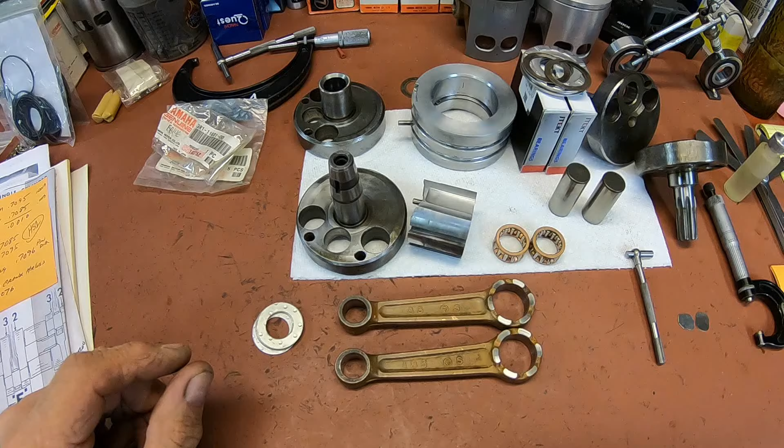Okay guys, I've got everything cleaned up here, measured up, and I think I'm ready to start the build on this. I'm sure I'll get sidetracked somewhere along the way, but we're going to get started anyway. As you can see, I've got all the halves cleaned up. I put them on a wire brush just to clean everything up, that way I wouldn't have any grit or anything to deal with, and then washed them with soap and water. Same with all the components I'm reusing.

Now, I decided to go ahead and use the Yamaha rods that were out of my spare crank. There's just absolutely nothing wrong with them. I was able to find the shims, which were OEM Yamaha, the bearings, OEM Yamaha, and the pins, also OEM Yamaha. So we should not have any problems here. This is everything you would have used anyway. I've had a lot of the 125 and 175 Enduros that don't need rods - everything's in good shape. You put a new bearing in it and pin, and you're on your way for another 50 years.

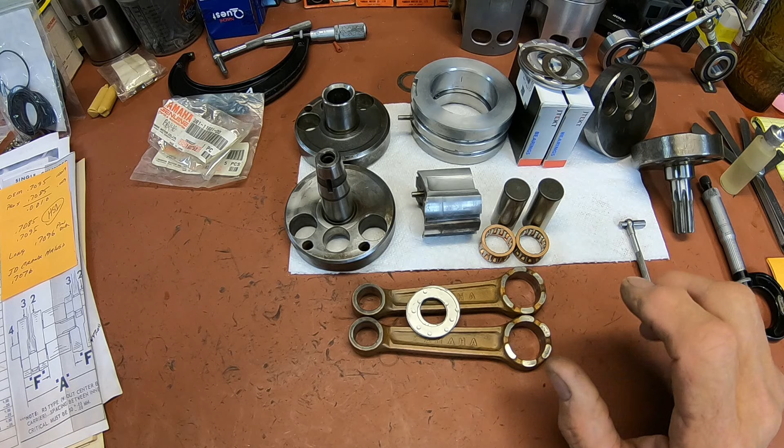So I don't have any trouble thinking about what I'm doing, it really seems reasonable to me. I do have a set of aftermarket rods, but I think I'm just going to save them. I've got a lot of engines running around here that can use those, because the RD125, I believe the AS1C, YASC, they all use it too. There's many that do. I think maybe the YL100 is the same, I'm not sure, but there are some components of the 100 that are different.

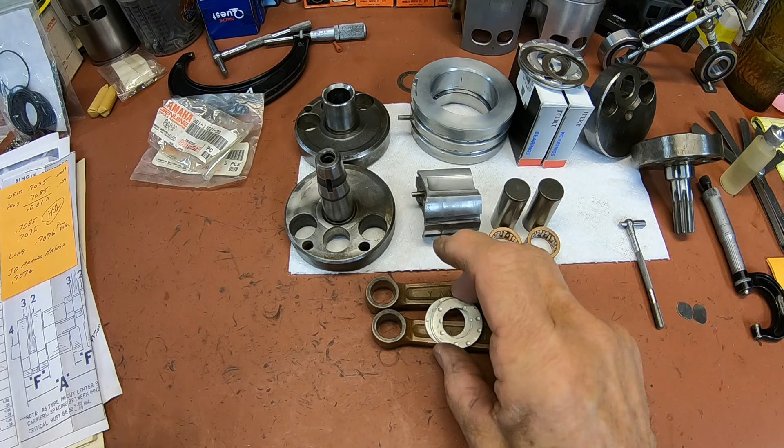The labyrinth seal is one thing that is different, so there are some differences in there. But anyhow, this is what I'm going to do, and I've measured everything up. I've counted the number of rollers here, they're the same as the ones that come out. The only difference I can see, these are within a thousandth of the same thickness. The only thing different is the length of the pin. These actually are a 3R1-1168-100, and they are about 50 thousandths shorter. Here's the original, and here's the new one. You can't hardly tell it, you just tell it when you measure it.

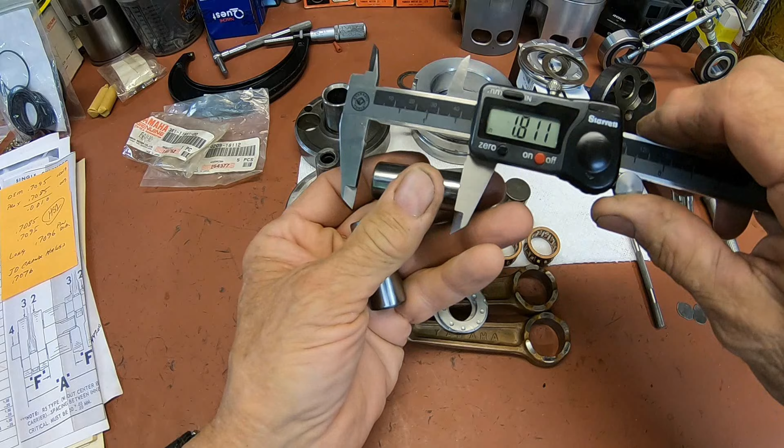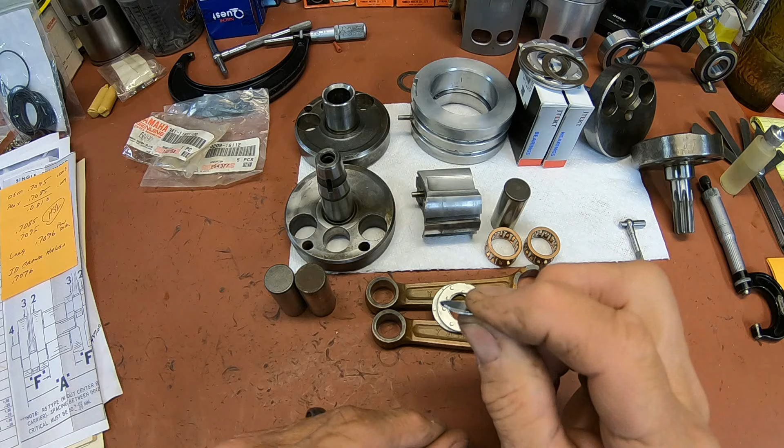So I'll be laying that in the hole as I install the pin on the first one, and that will be so it won't go quite all the way through. That way we're not going to be super short on the other side, that's the only reason for doing that. But this is the pin they list, so it should be comparable.

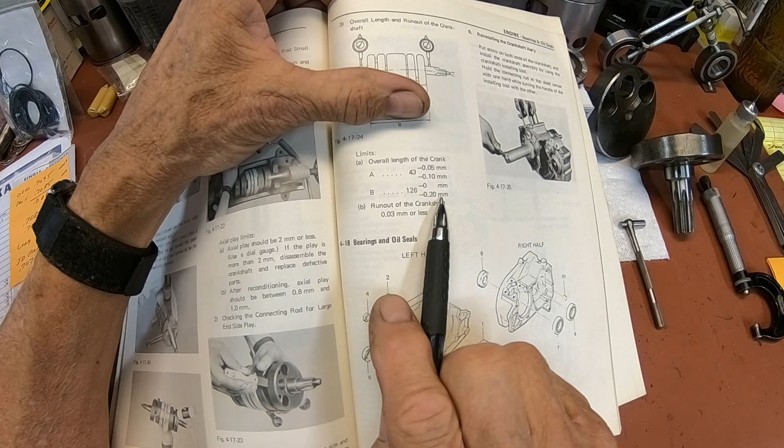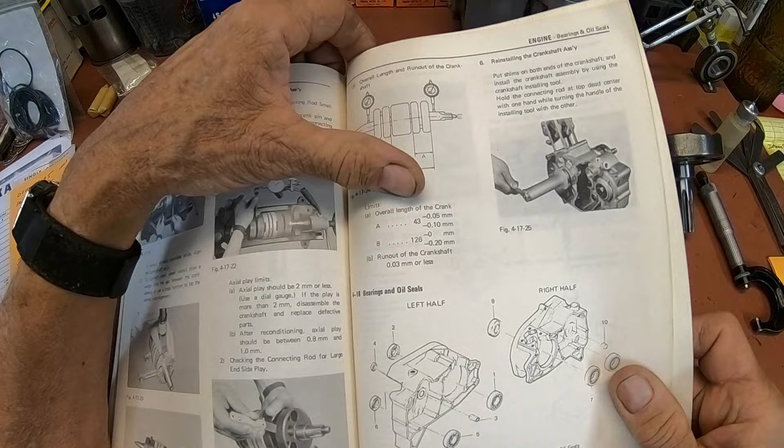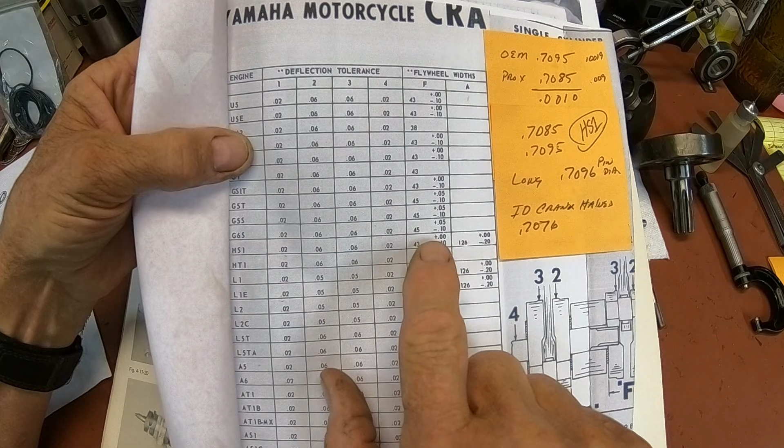Now, I was looking through my book here, and I noticed, when we put these together, we want 43 millimeters minus 0.10 millimeters for our overall width on a single. Then when we put it together, we want 126 millimeters minus 0.20 millimeters. Now what you'll see here is this 0.05 millimeter up at the top, and I'm not sure what they mean by that, so I went to my crankshaft chart, and when you look on here it's still saying plus 0 and minus 10, and minus 20 plus 0 on the whole, the two put together. So I'm going with that. I think they're trying to say plus 0.05 millimeter.

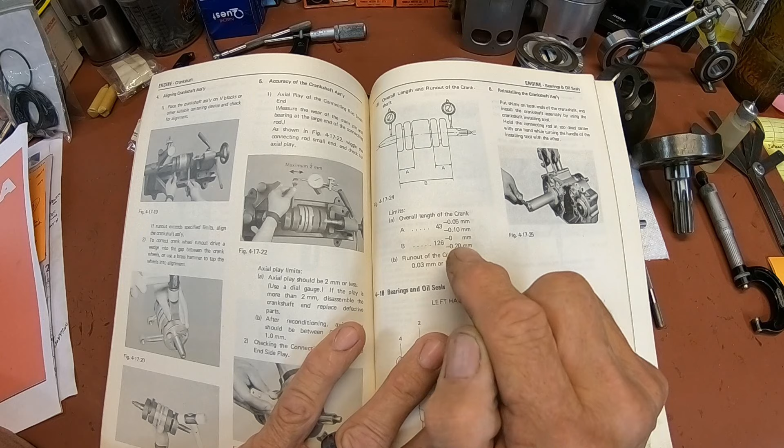But why would it change? I don't see the reason for the change. So I'm just going with the information that I've used in the past. I've always never added a plus to it. I've always gone on the minus side if I had to. That way you know it's going to fit back in a case and not be bound up or something else. So I've got the measurements that I had coming out, and actually we had one that was just a little bit over, but we're going to try to get as close to this as we can, only with no pluses.

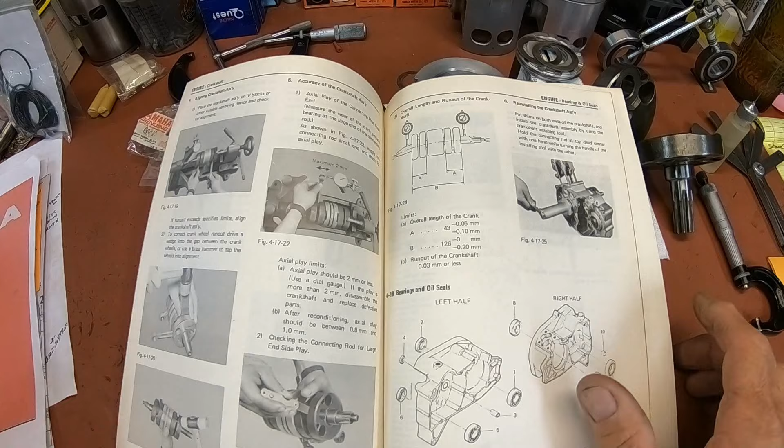So the first thing we'll be doing is we'll take this one here down and we'll go ahead and install a pin in using our shims to keep it from coming all the way through. And then we'll assemble our crank and go ahead and put the other half on.

Now the half, the mag side, this is the mag side, and this is the labyrinth seal side. This is, of course, your seal right here. This is where it fits, and I don't know what the difference is, but it does fit through there. And the whole reason is these slots in the middle are to slow down that movement. But this is normal for one with a labyrinth seal, with this type.

Okay, so that will eventually go in right here, and it goes in with an O-ring, and it'll probably have to be pressed in a little bit. It'll be an easy press, but it'll be a press.

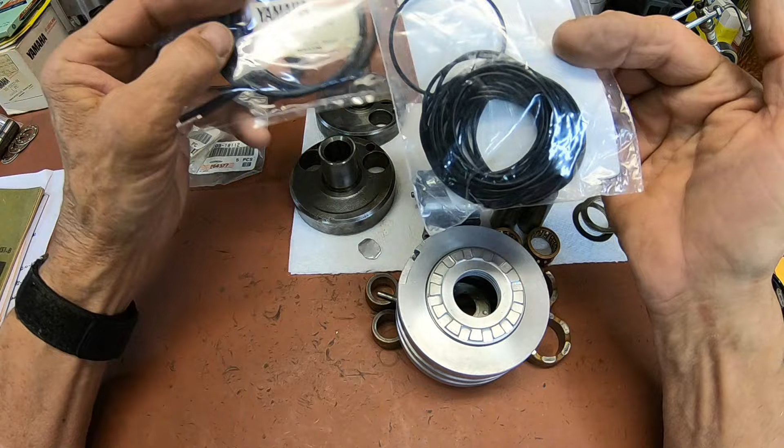I bought a whole bunch, now it's a package of 25, I think, new seals from Grainger. I just measured up the one that came out, and this is the one. I'm just not going to buy a 20 or 50-year-old O-ring and put in there. Have no choice on these. These are probably 50 years old, but they're going to be better than the ones that have a set in them that came out of it.

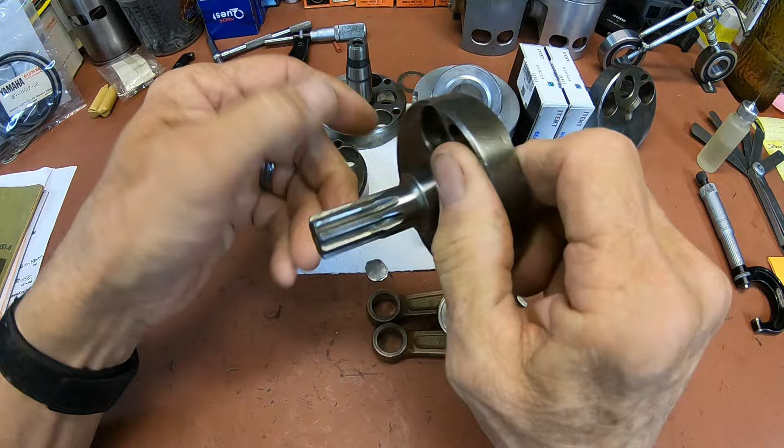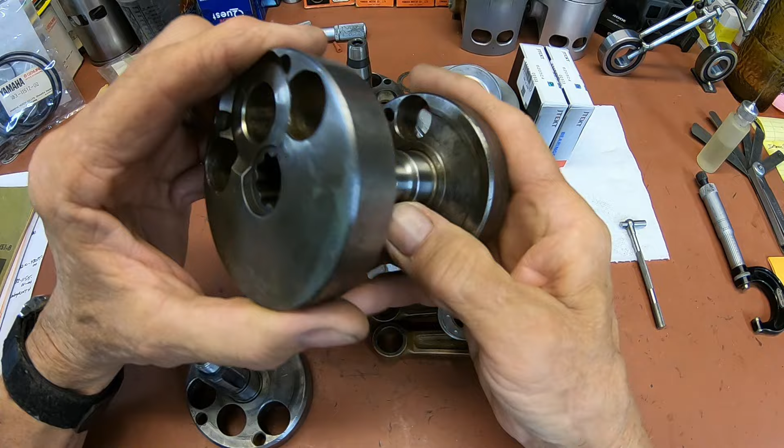So that I was able to get. These will press in when we get to that point. And we have to remember that we've got a shim on both sides of this. When this goes together, it'll get a shim right there, and same on the other side. And on the magneto side, or the clutch side rather, this is the clutch side here. Actually, this is the side that goes through the labyrinth seal, like this. And it's pretty much going to be pressed all the way down, I believe is how it works. They say you can't overdo it or underdo it. Well, I suppose you could underdo it, but you'd have the measurement to tell you that it's wrong. But anyway, the two splined pieces are pressed together, just like this.

So let me get set up. We'll go down and we'll start our first one.

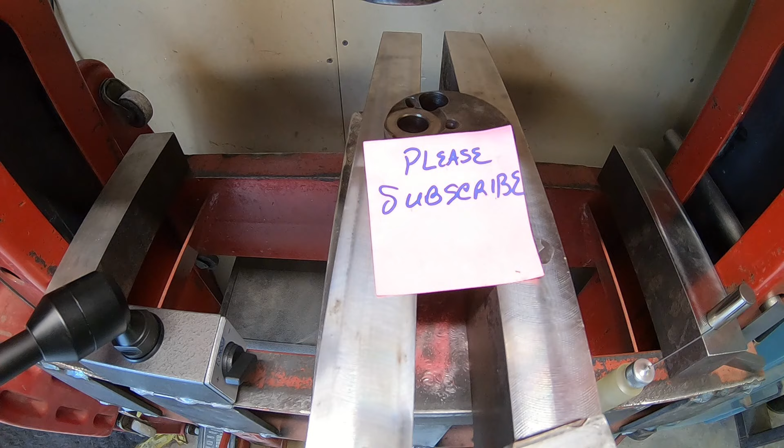Okay, I've got the part that I'm going to push the pin into here. I've already got it lubed up, and I'm going to put a little light oil on the pin also. And before I stick that in, I'm going to stick my little pile of shims in. Just want to make sure they lay down flat there. And everything should be good there.

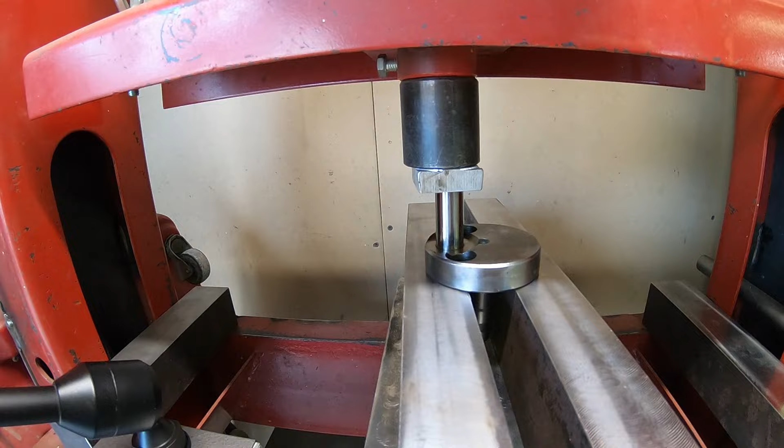Got our pin here, let me move that on down a little bit. And I'll put my aluminum pusher there. I think I went a little far. Try to keep it straight. All right, let's see if it'll push in there. Okay, that should be it. Pretty tight. Yeah, and that's what I was looking for there, just so it's not coming out the other side. I can always push it more if I need to, but that should be okay.

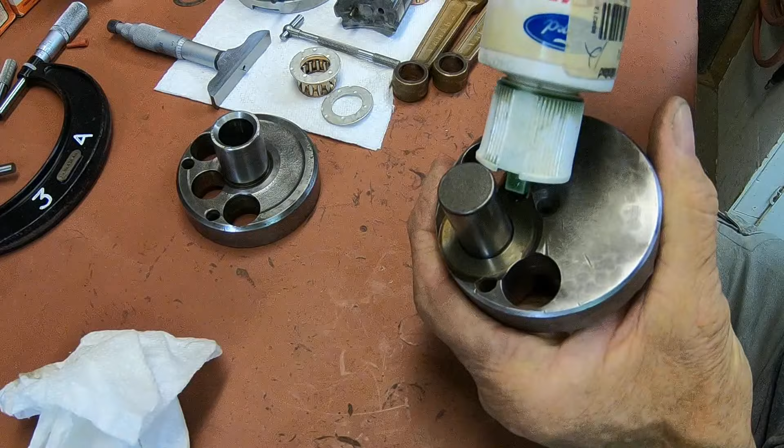Okay, so we need our assembly lube. Now we're looking for 4 to 12 thousandths in our gap here between the one side of the shim and the flywheel half.

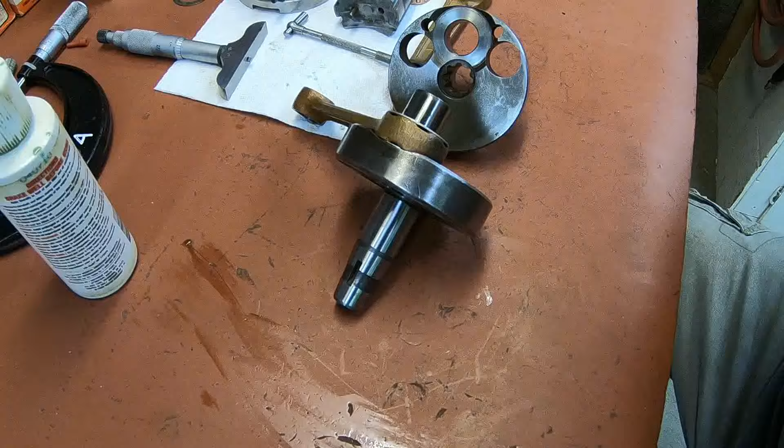Okay, so we've got everything here. We'll take our other half over and we'll try to straighten it out and press it on.

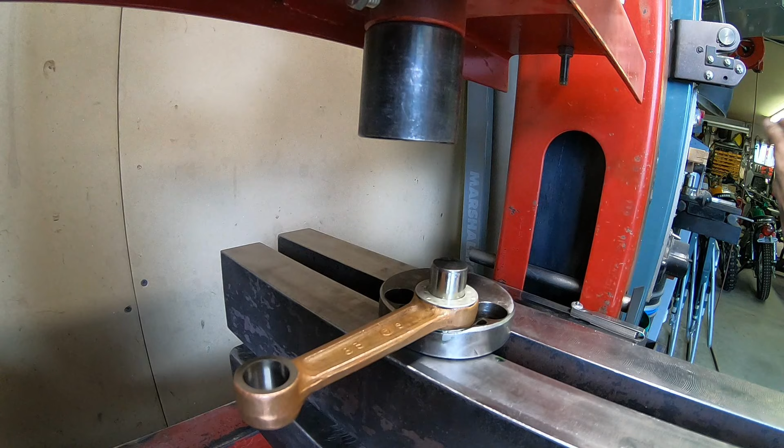Now I've got to stick my little shim back under there. So we'll stick it back in there, or shim pack rather, and I've got it in there with some grease. Real thin grease. That way I don't lose it when I try to stick it in there. And we got our oil on there, and in the flywheel half too.

Okay, I think I've got this pretty well lined up here. I just tapped it around until I am pretty square on 3 places, so that I believe will work. So we're kind of started, so let's start pushing here and see what happens.

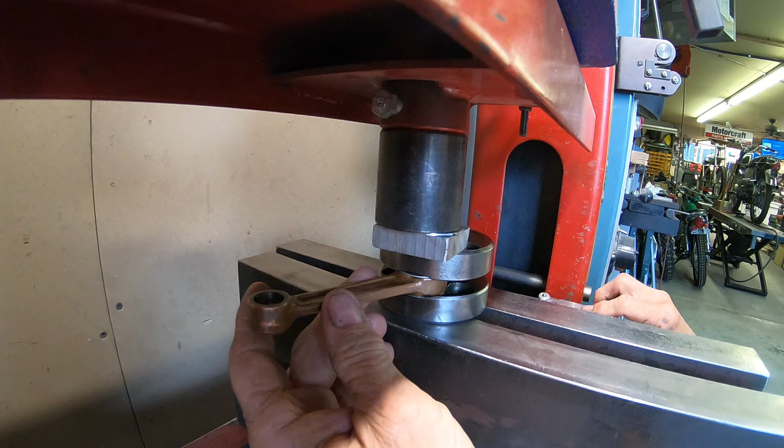And we're after... okay, I'm going to take it off and see where we're at there. I just don't want to go too far.

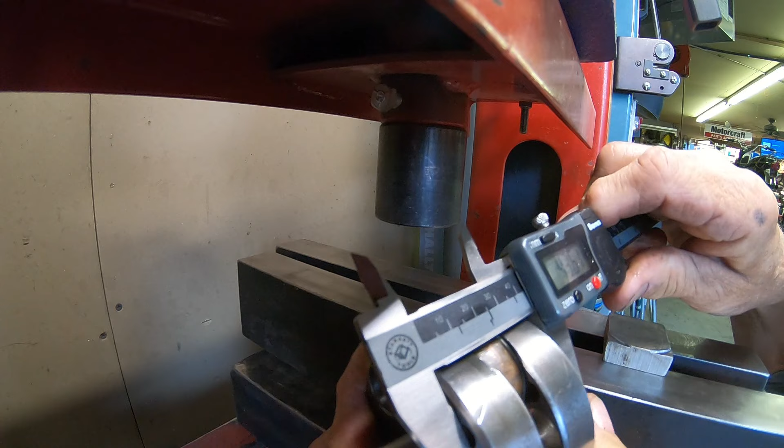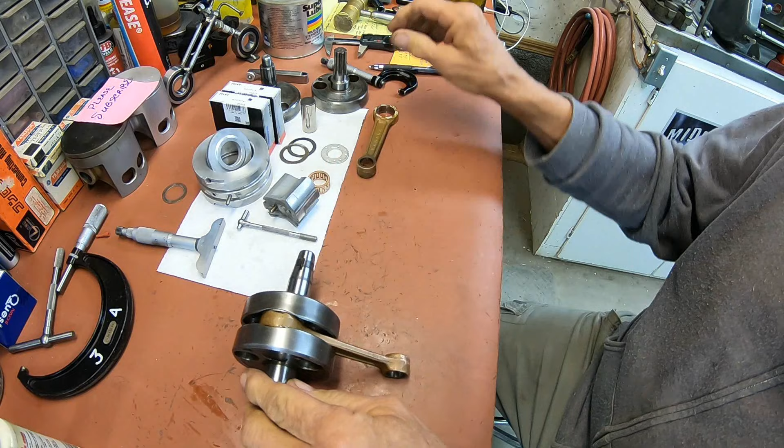Okay guys, I think we're looking pretty good. We're at 43 right there over the pin, and about 42.93, 180 out. And that's probably all we need to do is come in here and wedge a little bit.

I'll show you how I do it. I just take a couple wedges like this. It's not a lot.

Now 42.96, so that helped a little bit. So I can go ahead and kind of true these up a little bit, but you can see the pin location here is just slightly recessed and just about the same on the other side. So we're definitely clear of our bearing, and I think it's pretty close as far as this way. It was lined up pretty good over there.

The rod is in good shape. I believe we were, the real thing is to have that 43 millimeter or just a little bit less. But I think we're pretty close on our dimension.

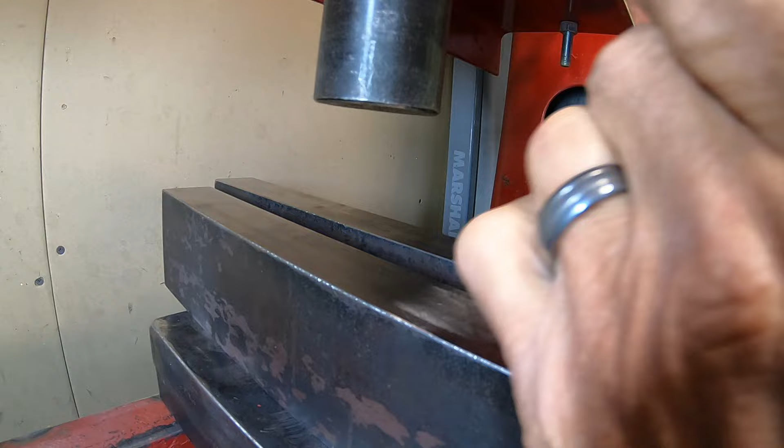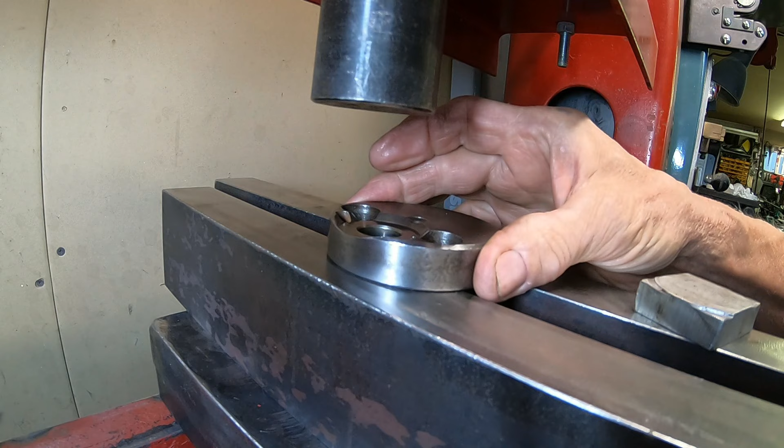Okay, again, we'll just put a little bit of real light oil in there. Set that up. I'm just putting the same 3 in I had before. Remember, we took one out. And a little bit of light oil on the pan also.

Yeah, it looks just about the same there as it did. Got our 3 little shims. Looks about the same as it did on the other one.

Kind of rainy and cool today, guys. We've been having a lot more rain than we normally do, which is a good thing. It's been so dry for so many years, so maybe we're back to our normal pattern. That's all I can say. It's probably 55 degrees. I'm to the point where I'm thinking about shutting the door and turning the heat on a little bit, but I want to get this press work done because I have more light with the door open over here.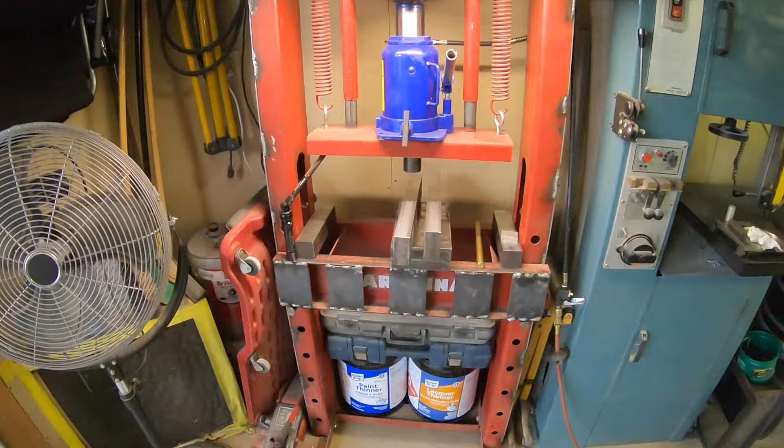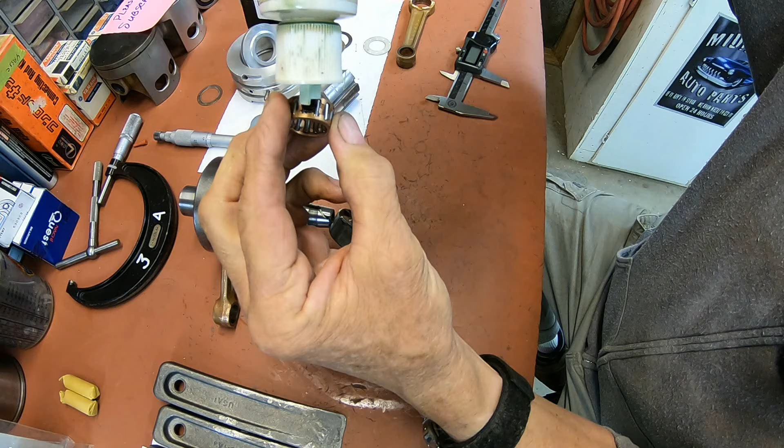Okay, all the same prep work here. Pretty gooey stuff.

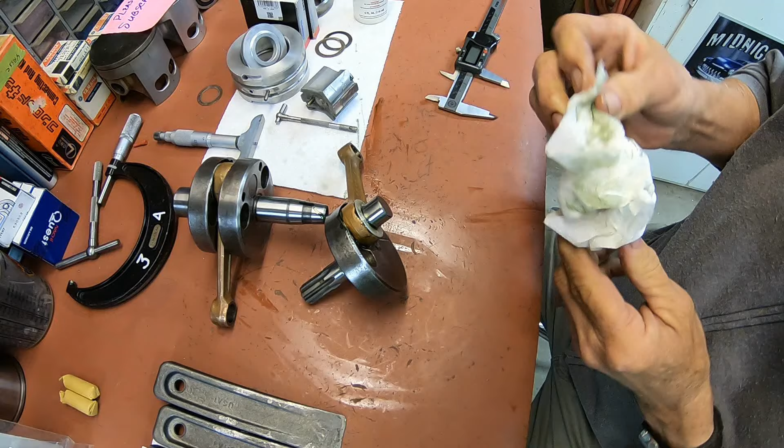All right, let me get this back over to the press and we'll press this one on. Okay, and a little shim back in there. Put a little grease on it to hold it so I don't lose it as I turn it over. And I've already oiled up the pin.

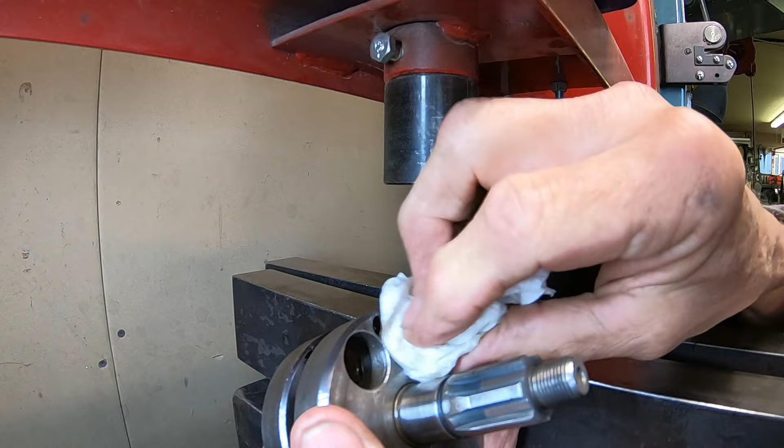It's looking real good. This is the side we just put in. This was the pin where we just seated the pin first. So it's looking pretty good, about the same. Take it over to the bench and see what we got.

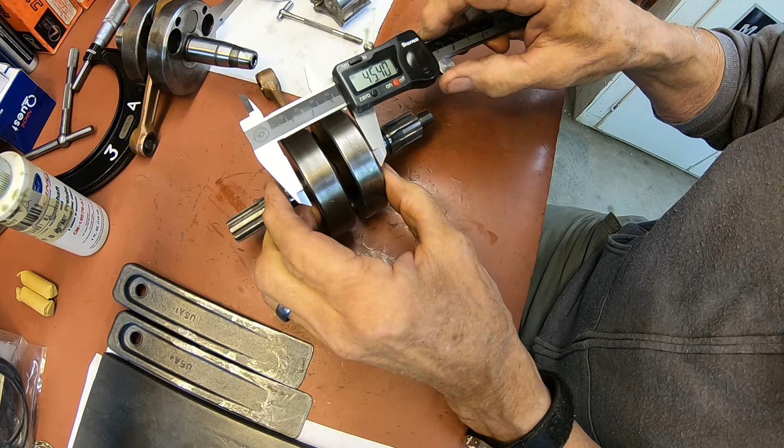Okay, let's see what we got on this one. 4295, we're in spec. And 4278, just a little bit narrow there. So we'll wedge this one. I may wedge the other side too a little bit.

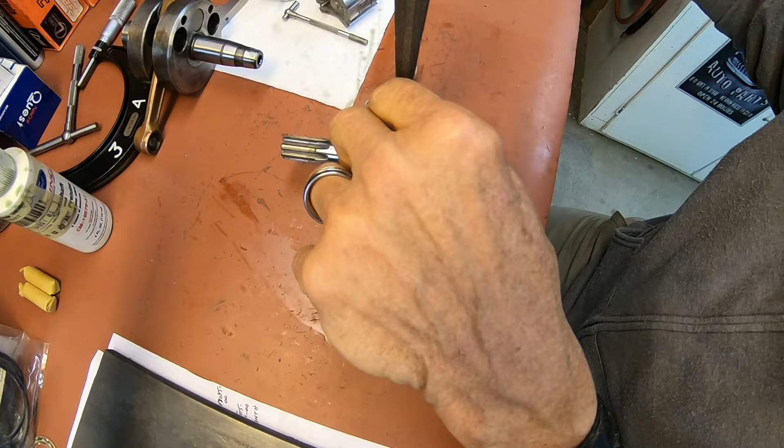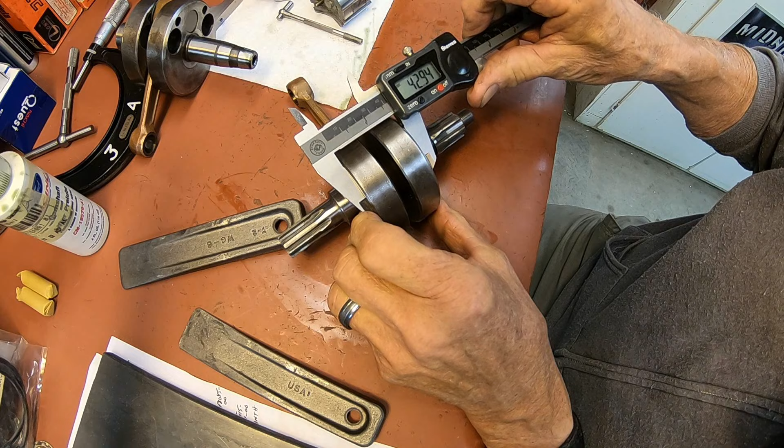Okay, 4293, that's within spec. 42, I got 4290 there. Let me whack this one a little bit. This one you got to get around the rod there, so you got to be careful. 4296, I think that's good. Okay, let's see what we got now. 42.97.

This is 43.02, so a little bit too much. 42.98, 42.96. I think we'll stop there. Looks good.

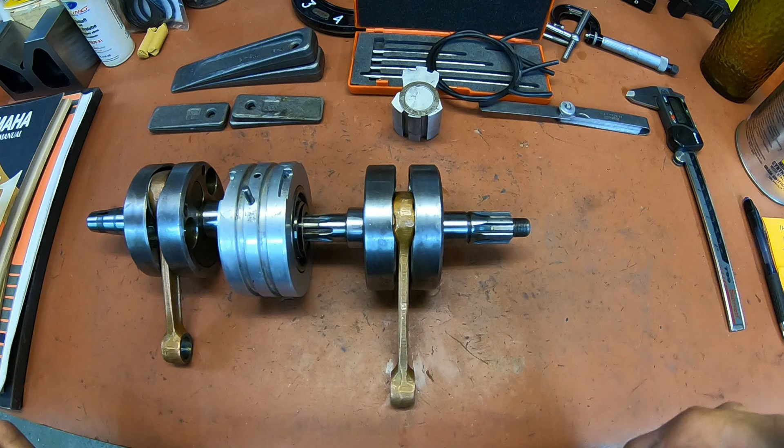Well, so let me get you over there. We'll get it set up in the lathe, and we'll take a peek at what we ended up with. Okay, let's get this first one in. Okay, this is the one I just finished, so that's why it's so close. Okay, we're zeroed out on both of them, and we've got preload on both. I can't see this one move at all. This one is about a half thou.

So those turned out really nice. Okay, so let me grab the other one. Get over there. Okay, so we've got basically no movement here, just a little, maybe a fourth of a thousandth, and about 1/1000 here. So it looks pretty good. And again, preload, preload.

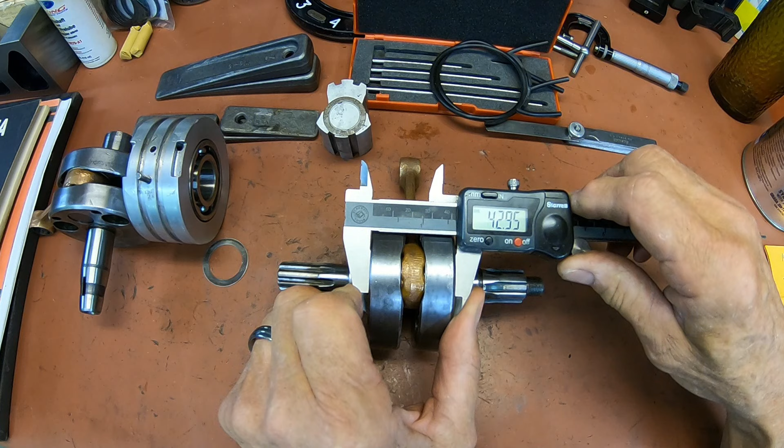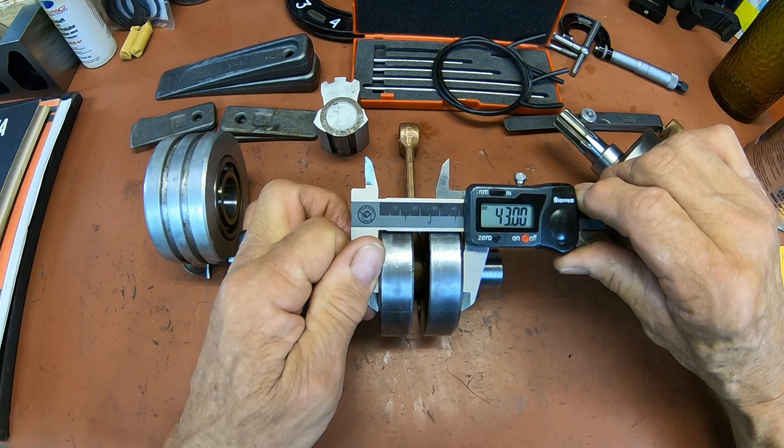Okay, now one thing kind of changed on me, and I had to refer back to my notes. I'll let you know what that is here in just a minute. Okay, we needed to be at 43 plus 0 minus 10. So we were there, 42.94, I think everything's pretty much the same. Actually, I've got 43.01 back here. I'm going to leave it there, even though it's just a tad over. And the other one, 42.98. And 43.00, so we're right there on our width.

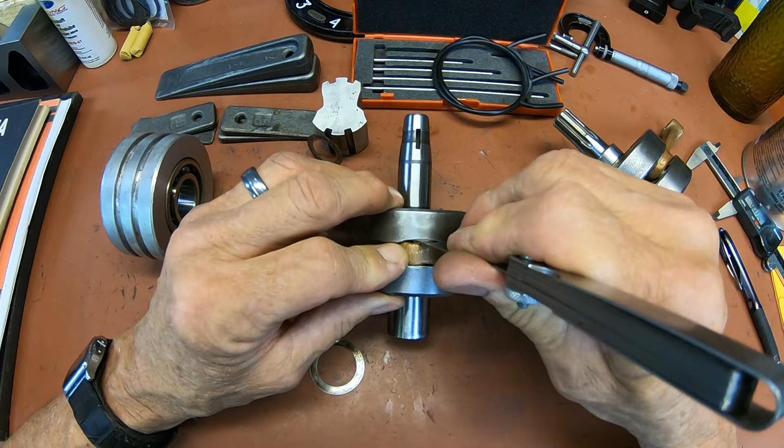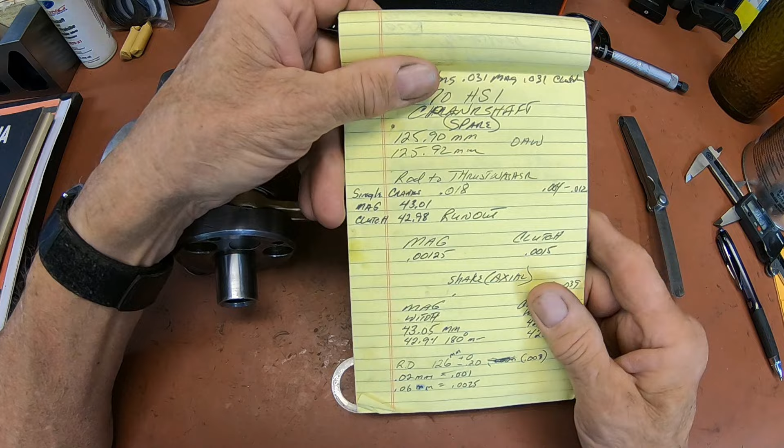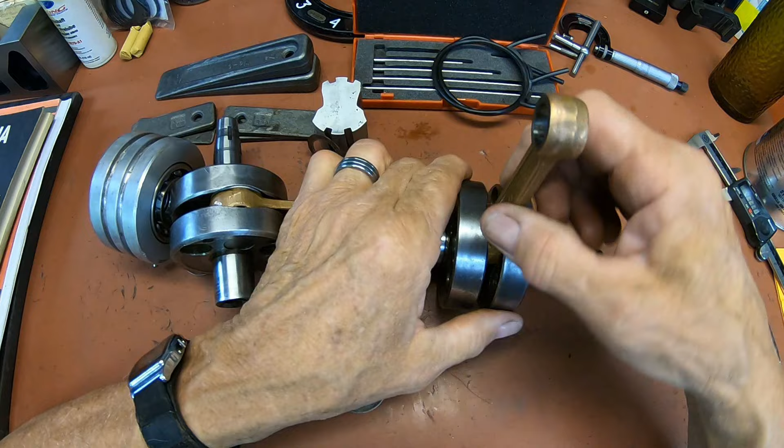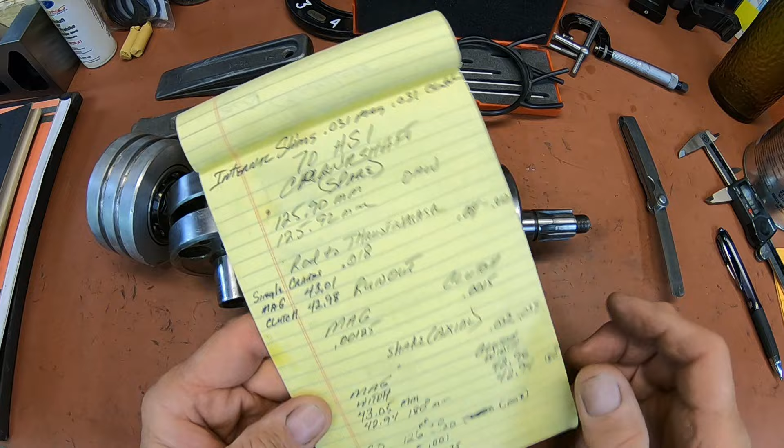And the one thing that is different is the book is telling me that we're supposed to have 4 thousandths to 12 thousandths here. And I've got a good tight 18. And the same on this one. And I kept trying to figure out why. You know, I'm right at my width, and that's what I want to be. That's the most important thing. But I can't meet this. And what I did was I referred back to my notes. And I'd written right here, it's supposed to be 4 to 12 thousandths, and they come apart at 18. So that's exactly the same as what they were. So there's, you know, they really specify this width more than anything. So I'm going by that, and with just a little bit more axial play there, I don't think we're going to have any issue. But that's the importance of writing down everything before you take it apart. That way you know what it was, and if you run into a situation like this.

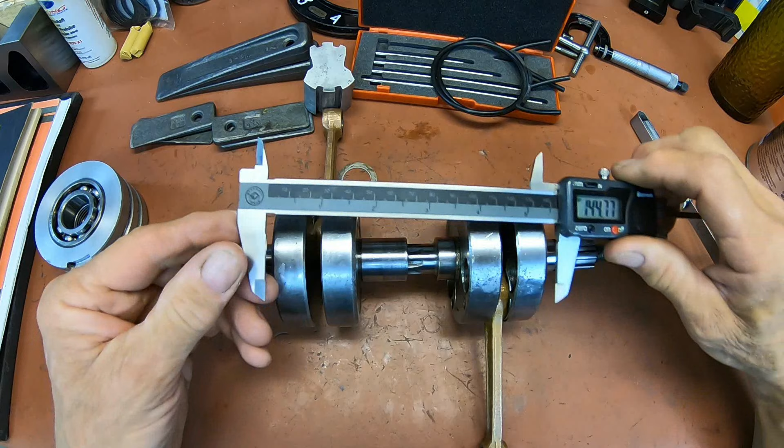Okay, the next thing that we need to take a look at, I'm just going to put these together. Actually, I'll go ahead and separate them by 180. Okay, that's how they're going to go. And I just had an inquisitive mind, and I measured this width right now. This is pushed in as far as I can push it on the splines. And I just measured that up at 143.40 or so, okay.

And when we get done, we're supposed to be at 126 minus 0.20. So that leaves us with about 17.40 millimeters or something like that. So I just kind of wondered, and if I go to 1740, see, that's exactly the width right there. That's the difference between what it is now and what I'm supposed to end up with. So when this thing slides together, it's going all the way up to here, and it's going to seat right there. So at that point, you should have your 126, give or take. So that's where we're at now, and we've got to make sure that we get our shims on.

Now, one thing that you've got to do is we're going to press this back together, and it says it's going to take quite a bit of pressure, up to 10 tons. And I just want to show you what they're doing here.

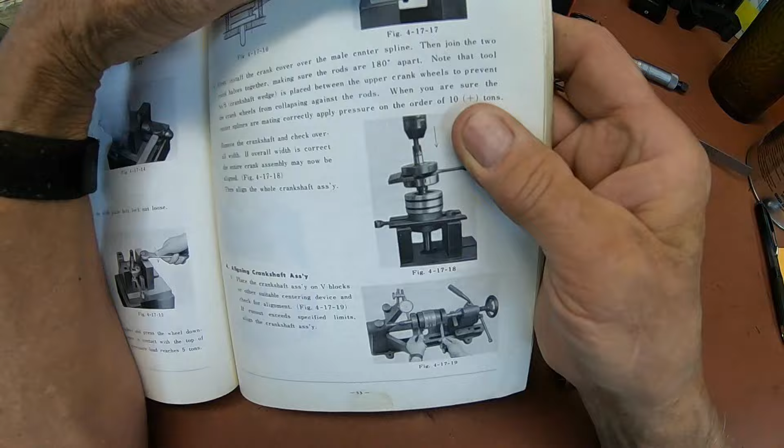See, they're showing pressing this one on with a wedge in here like this, and the bottom one in a plate where otherwise it's supported, so that it's not going to change anything here. So it's very important that we wedge everything here properly so we don't end up pushing this half down further.

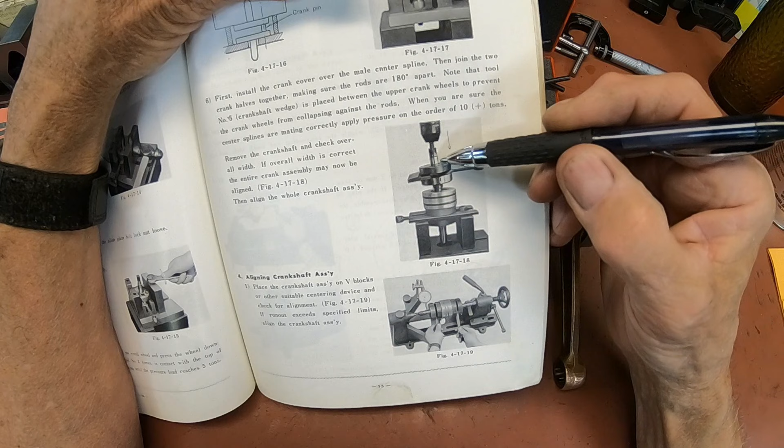Onto the rod, taking our clearance completely away. So what I'm going to do is make a pusher that'll go over this shaft instead of pushing on the shaft, and then wedge on both sides like this, so I'm actually supporting this side too, over by the rod. There'll be a set of wedges here and a set of wedges over on the other side. Hopefully we won't get any movement.

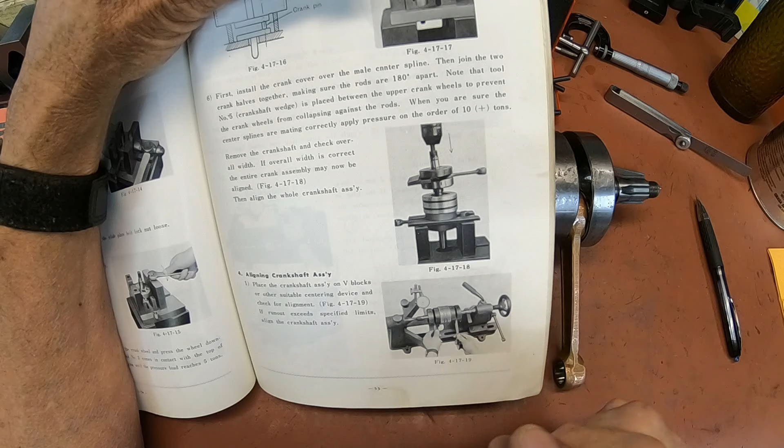We need to maintain all the alignment and run out that we have, so that when we put them together, we don't double up on everything, because we've got to check it again then. We're just gonna, I got to set up to make the pusher. I don't have anything quite like it's supposed to, that it will fit it. So that's what we'll do now.

Okay, I've got it marked right here for my length. And this is DOM tubing, so it'll certainly take the strain. And I've got to bore it out. I'm just going to take a cut along the outside just to show the dimension, my length.

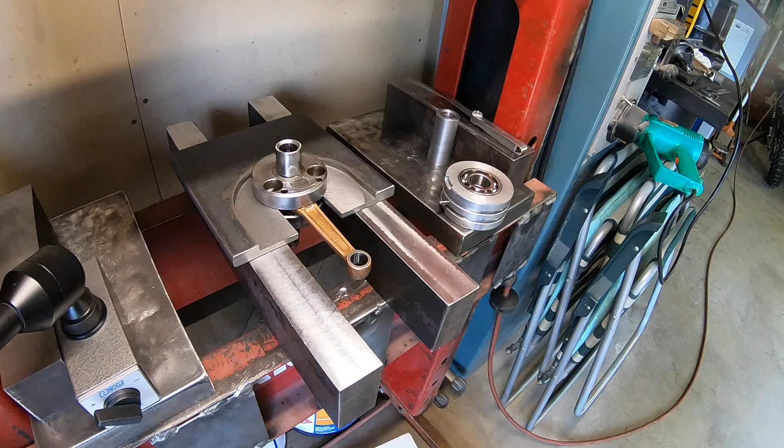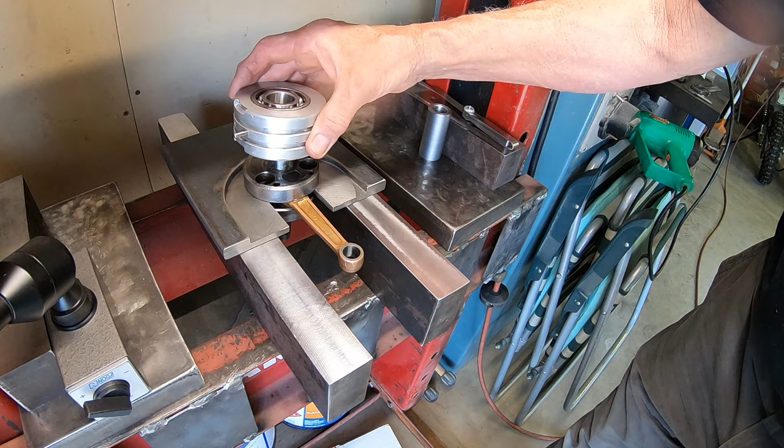Okay, I've got my magneto side on here with the rod facing out. I've got a little grease on here to hold my shim in place, and I know the oil holes go toward the front, so this is how it's going to go. I'm going to heat this bearing up with a heat gun and slip it on there, and then we'll start with the other half.

And on that one, I've already got my shim on here greased up. I've got two sets of wedges wedged here and here, and we'll be pointing this rod to the back. But first thing we got to do is get our bearing on. We'll just heat this race as hot as we can get it with this heat gun.

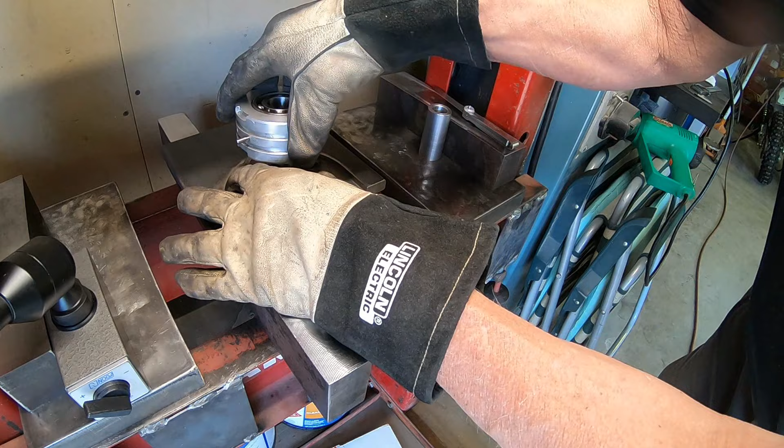This should just pop on. Right down on it.

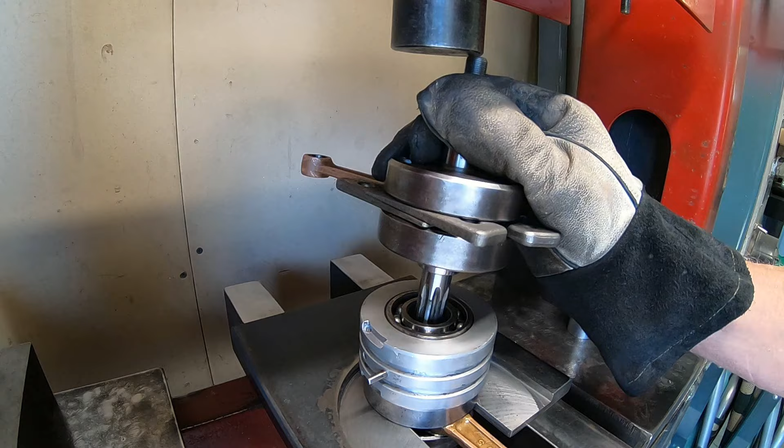Okay, we'll locate this one. We've got our shim on here. Locate this one to 180 degrees to the back. Should be it right there. I've slid it out enough to get the pusher on.

Okay, I think that's it. Okay. All right, looks good. And we're at 180. So let's see what we've got.

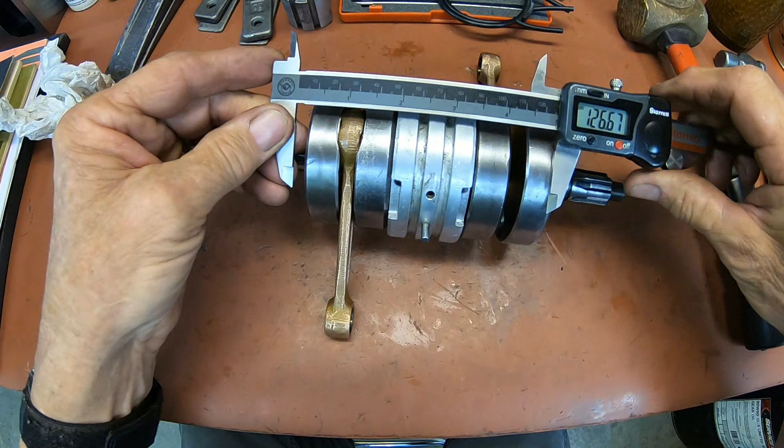Okay, I've got 2601 here. 26 is what we want. We really don't want to be any over, but I'm not going to worry about a .01. And let's look at 180. 2581. So that's within the 20. It is 20, .20.

And we just want to see what we're... Okay, we got a good tight 18 there. So it must have moved on us a little bit. And just a perfect 18 there. So our dimensions are close.

So our next step is to go ahead and put it in the lathe between centers and see what our run out is on this one now.

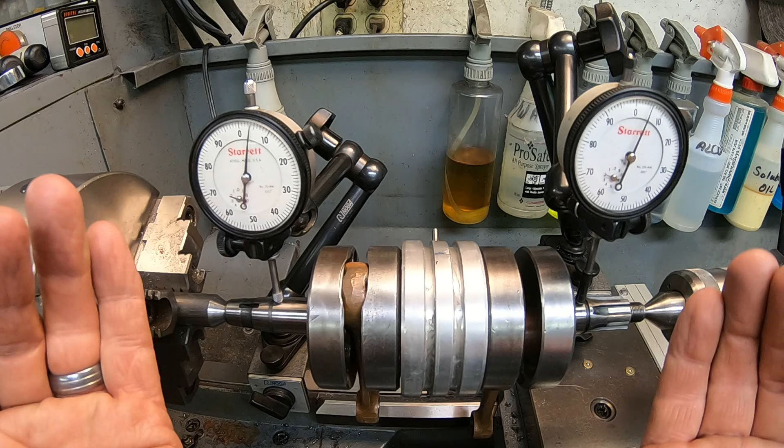Okay, looks like we're off a little bit here. Looks like four thousandths here and five over here, and it's at the same time. So this is coming up like this on both ends, just a little bit. So it needs to be either on this one here, either it needs to be wedged out, or it needs to be knocked down, probably. And this side, I'm thinking knocked down, because there's no way to wedge it here.

Not too bad, I don't think. You know, when you slide something together like that, you don't know how things are going to turn out and what else you're going to affect.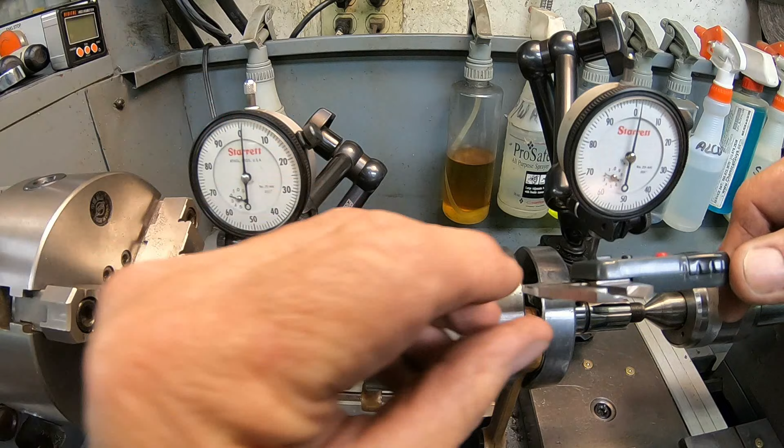First thing I'm going to do is take my caliper. This isn't a big for-sure thing, but it gives me something to look at. Okay, I'm at about 764 right there, that's 7.64 millimeter. So I come back around closer to the other side, okay see that's 720, 731. Let me go back to the other side of the connecting rod. I've got this magnet over here messing with me. Yeah, 783, so it's a little closer right here in the middle.

So I think the first thing I want to try, and we're just doing one side at a time. Don't try to do them both. Chances are, if you change one side, you're going to affect the other side anyway, and it may be to its detriment, or it may be better. But this is the one that has the most, so I think what I'll do is try to open this up just a little bit with a wedge.

Actually, you know, I don't know whether that's the right thing or not. I think I may need to close it. I'm just going to stick this in here and move it a little. Yeah, see? It's moving this way, it's getting worse if I wedge that. So it probably needs to go in a little bit.

Got to try it. Okay, I just whacked that a little bit right here on the outside, and now we're looking at about 4, and this side is closer to 3. So that's doing something for us right there.

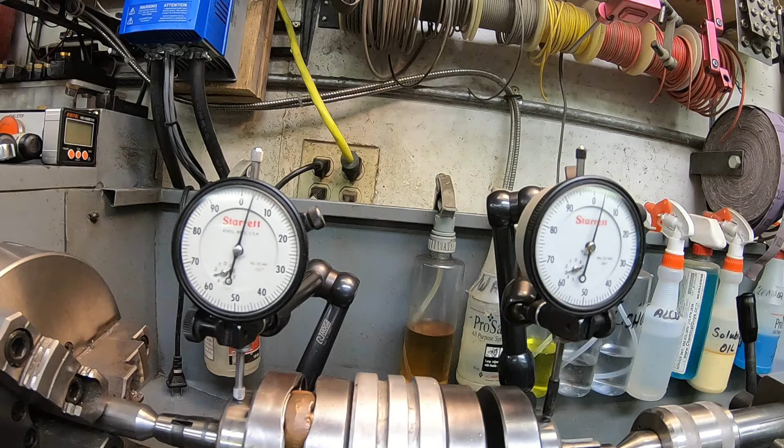Okay, see that one moved it back a little bit, but we're still at 4. And this one's where it was, about 3.5. So I'm gonna have to look at some other options here. Okay, I've got it down to 4 on this side and 3 on the right.

So I'm going to continue doing what I'm doing. I'm spreading this one here. I'm working on this side right now, so I'll spread this one again and see if we come up with anything. Okay, just been working it right here.

180 degrees from the pin there, and just do that and then take it back over and check it again. Took care of a little bit more of it.

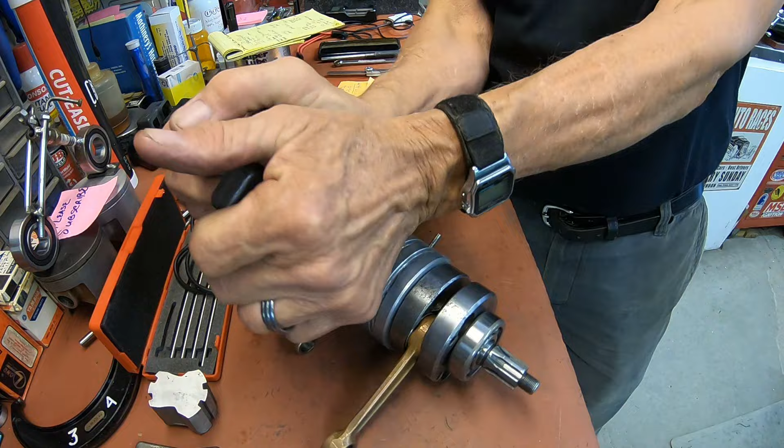Okay, we've got about 2 here and 2 here. So what we're doing is working, so we're going to continue to do it until it goes the other way or gets to where we need it to go. You know, the key here is both of these are moving at the same time and have been for quite a while. So there's pretty much one thing taking place - I haven't moved this one, and this one, by moving it, moves this one. So just one at a time, one at a time. If it starts going back the wrong way, stop and go back - instead of spreading it, whack it back in just a little bit or whatever.

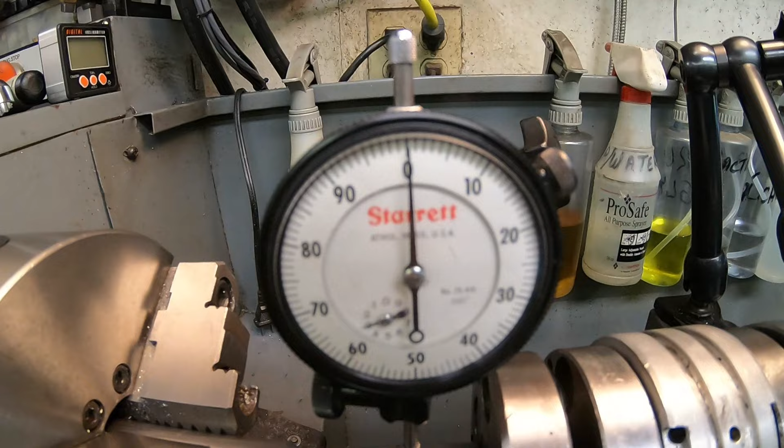Okay guys, I think I got it. Took me a little longer than normal. We got preload, and I've got about a half thou on this side, and this one you can just see it move a little bit. It's not even a half thou.

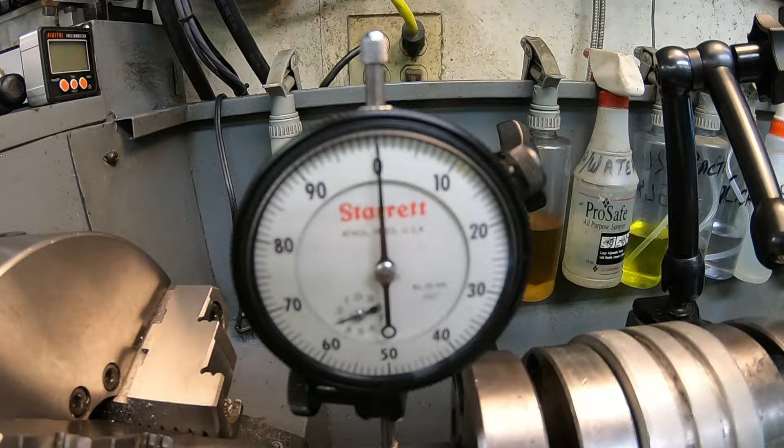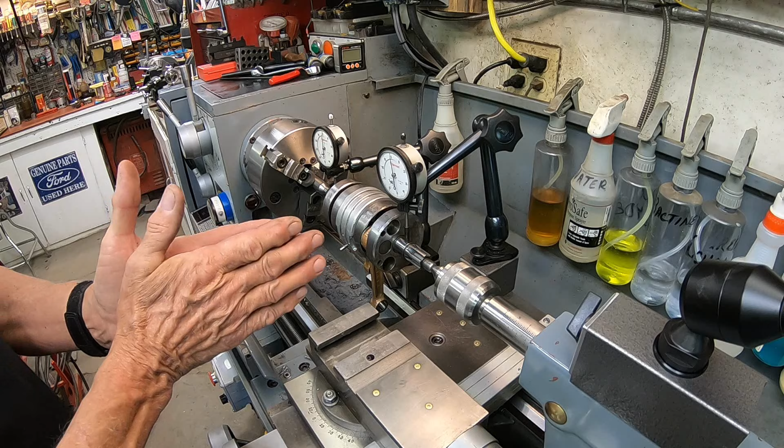All right, happy with that. Like I say, it took me a lot longer than I normally take on those things, but I don't generally do these twins. It probably took me 5 minutes on each one as a single crankshaft, and then when you put it together, it's just almost like you're starting over again. This one took me, I don't know, a couple hours. It was, I'd hit it or I'd wedge it and I'd go past, so I'd have to get back to where I was, tap it or whatever to get back, and then remember how hard I hit it, how hard I wedged it, whatever. And it's just a slow process, it really is. Some of them can be just a pain in the butt - this one was. But the end result is very good.

And like I say, the runout is just outstanding on it, but it took a long time to get there.

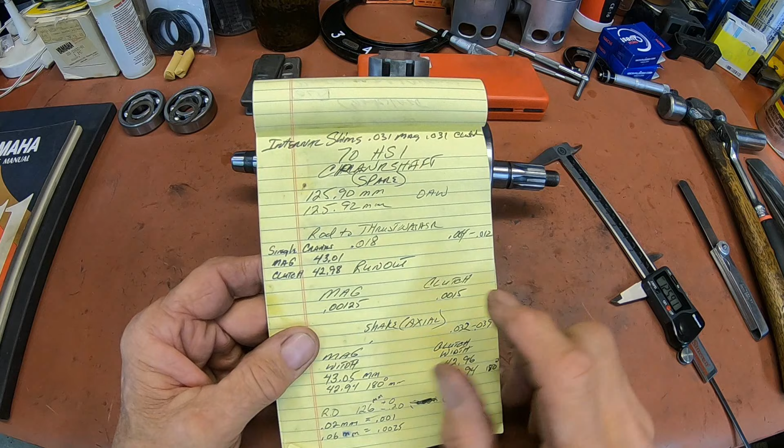These were my figures there. And like I say, it showed 18. I know the book says it's supposed to be between 4 and 12, but it was 18 when I took it apart. And yes, there could have been some wear there.

And I measured the thrust washers that came out, and they were within a thousandths of the new ones that I put in. So I don't think there's going to be an issue there, but we ended up with a good tight 18 there. And just a good loose one there. So this one's probably 19 would be my guess. But I think it's going to be just fine.

I had at one time, I was just having so much trouble with it. I went ahead and slid the bearings on. I don't know if you noticed that or not. They don't change anything when you're doing the indicator like I was on the lathe. They read exactly the same, whether you have bearings on it or whether you're taking the reading off the shaft. But I took it and put it on a set of V-blocks just to see if it made any difference.

I was drawing it, kind of looking for what the problem was. And really, my problem was that I was going past my adjustment all the time. I was just being a little rough. These are very small, and I'm used to the 125 singles or whatever, a lot bigger, and they don't move as easy, I guess. So you got to whack them a little harder. But in this case, that's why I put the bearings on, and I took them back off for the final. They were reading exactly the same.